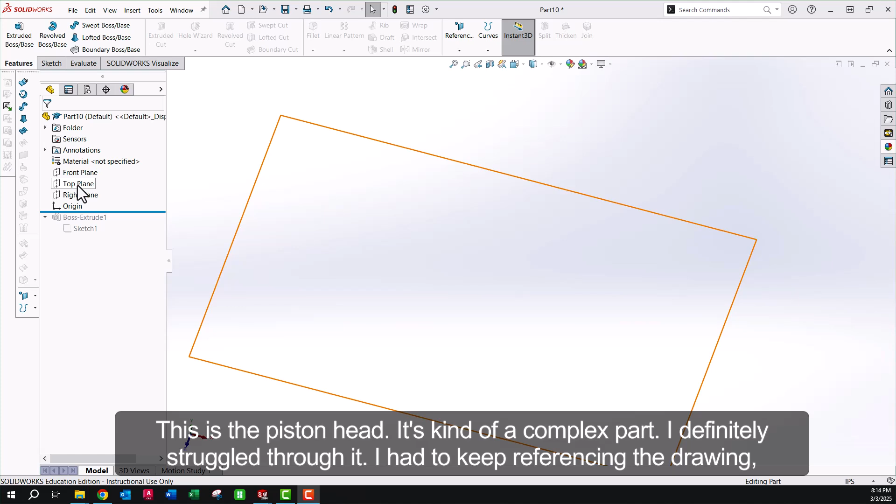This is the piston head. It's kind of a complex part. I definitely struggled through it, had to keep referencing the drawing, slowing down, thinking through my steps.

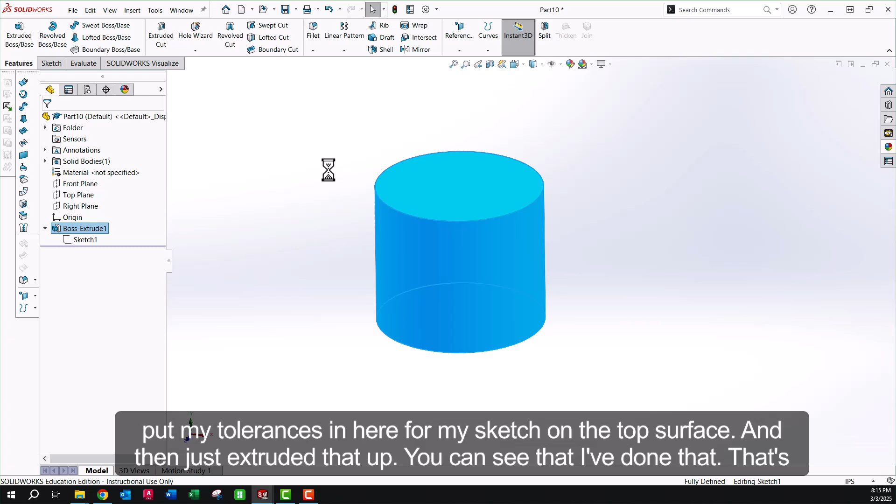I've gone ahead first and put my tolerances in here for my sketch on the top surface, and then just extruded that up. You can see that I've done that. That's just the entire height of the piston, 2.35.

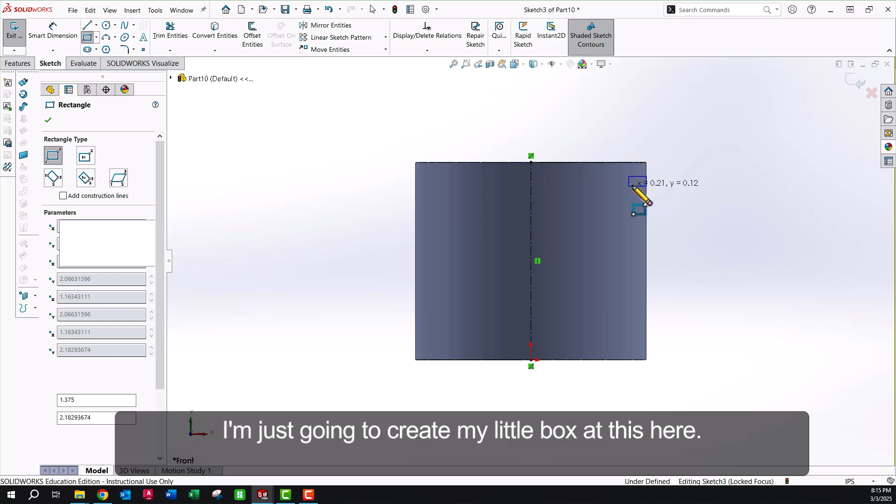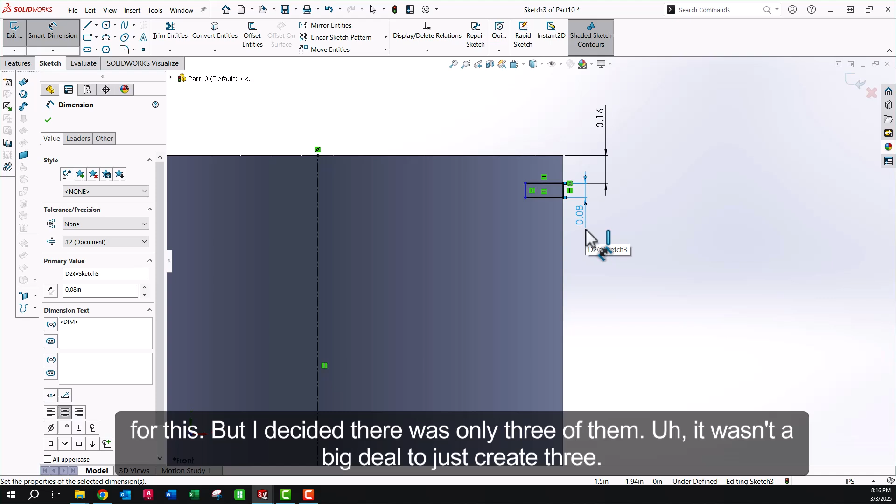And now I'm going to do the revolve cuts, where the rings go. First thing is usually a good idea to put an axis in there, and I'm just going to create my little boxes here. Just going to dimension one and then base the other ones off of that. I could use a pattern for this, but I decided there was only 3 of them, so it wasn't a big deal to just create 3.

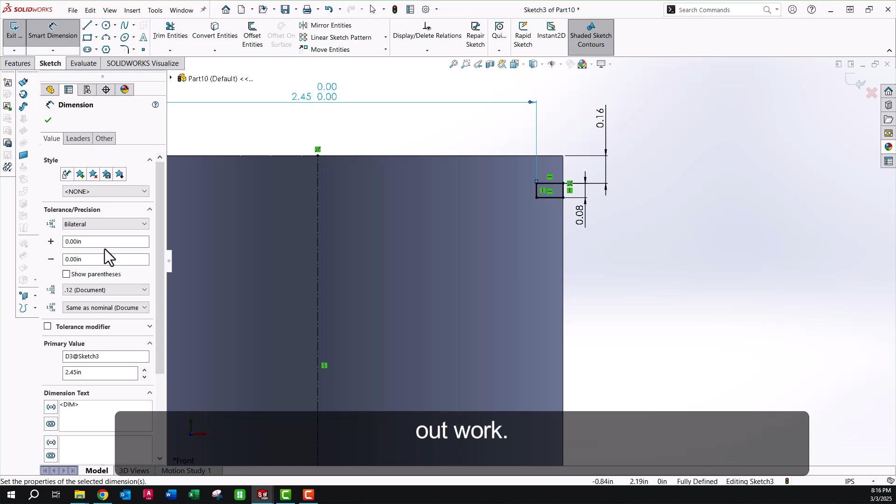Okay, so we have one in there. We're going to add the tolerance that the drawing calls out for. Got to make sure you have enough places after the decimal to display it. Okay, a couple more boxes.

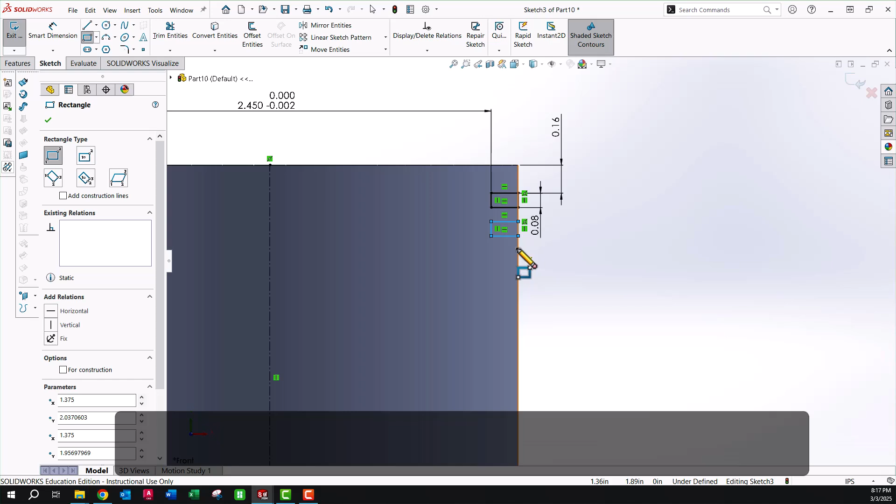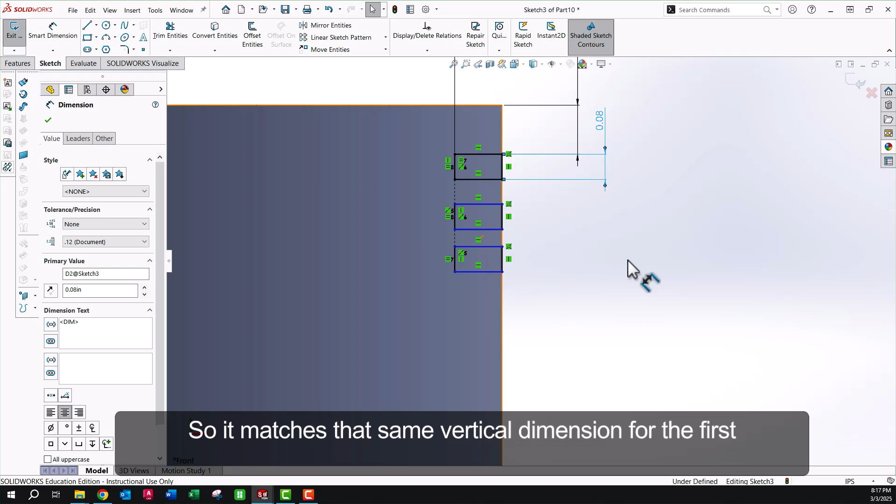Okay, we are going to make these 3 lines all collinear, which locks those into place. And also we're going to make them equal, so it matches that same vertical dimension for the first one.

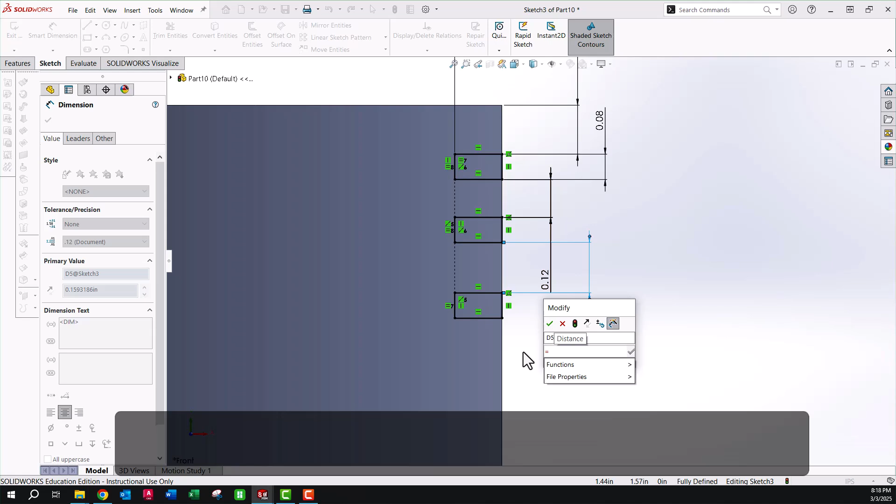Now we're just going to do a gap there, distance between. And then what I'm going to do here is I'm going to start to do the same thing, but I'm going to type equal instead, and tap the distance that I put in above. Just tap on that dimension, and it's going to make it equal to that. Kind of a neat trick.

Okay, cut revolve. First step is done.

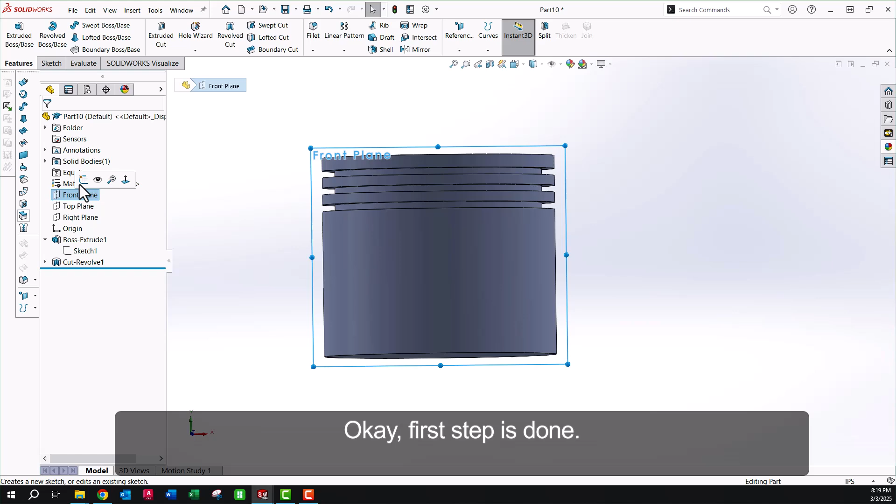Now we're going to make some cuts. I'm going to do a mirror line, and take like a chunk out of each side of this piston.

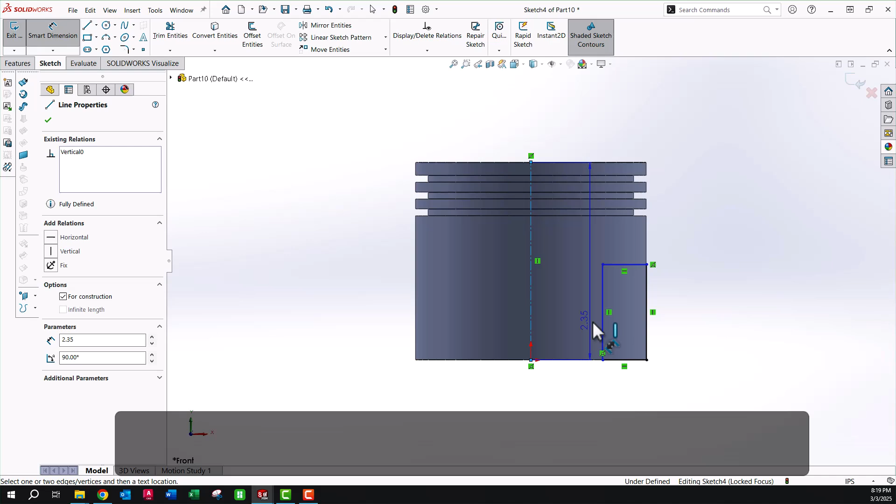Took me a second to figure out where that was on the drawing. Okay, simple mirror across.

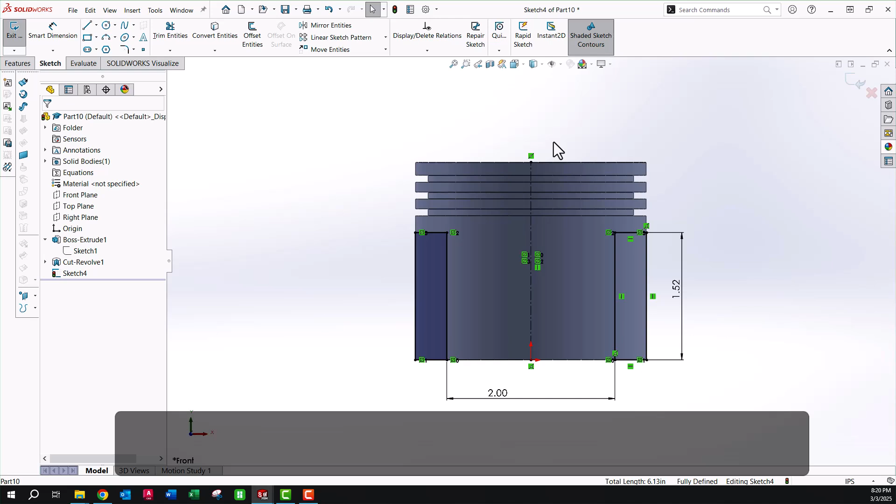And for some reason, that other one isn't shading. That makes me nervous, I hope this cut works. Oh, okay, through all, both, going in both directions. Okay, we have those cuts.

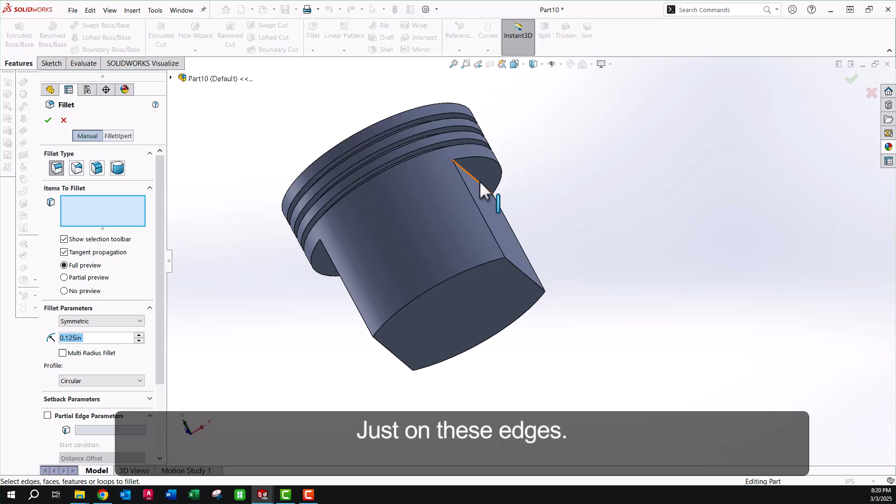Gonna add a fillet, 0.125, just on these edges. There and there. Okay.

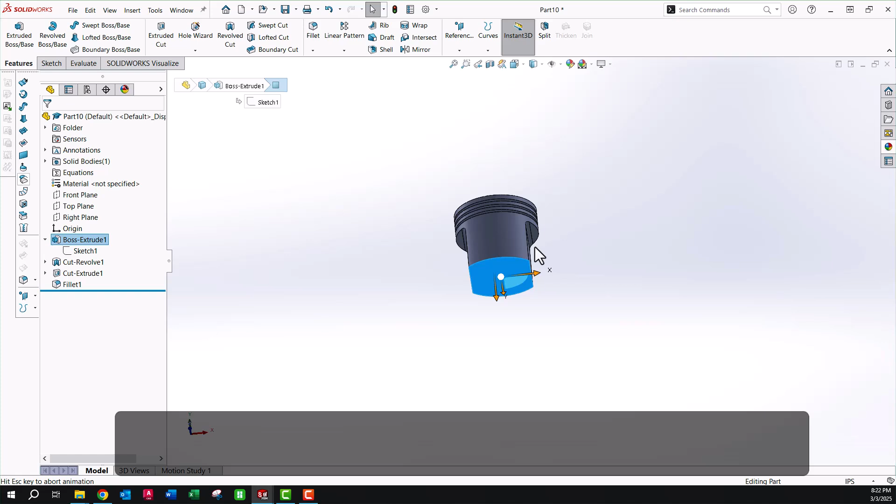We're going to do some cuts on the bottom. So, sketch on that bottom surface there, and a center line, because we know we're going to do more mirroring.

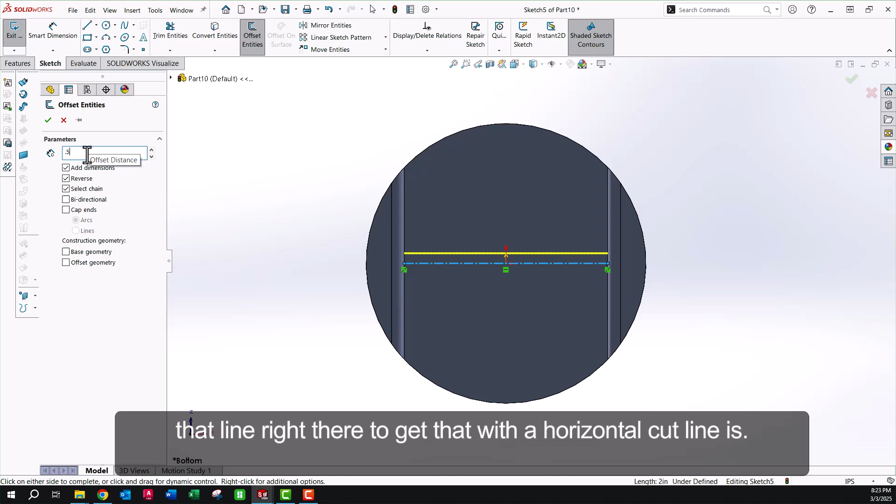We are going to offset that line right there to get where that horizontal cut line is. And the next thing we're going to do is we need an offset off of that outside edge. It's 0.125, and it's also offset off of those edges as well.

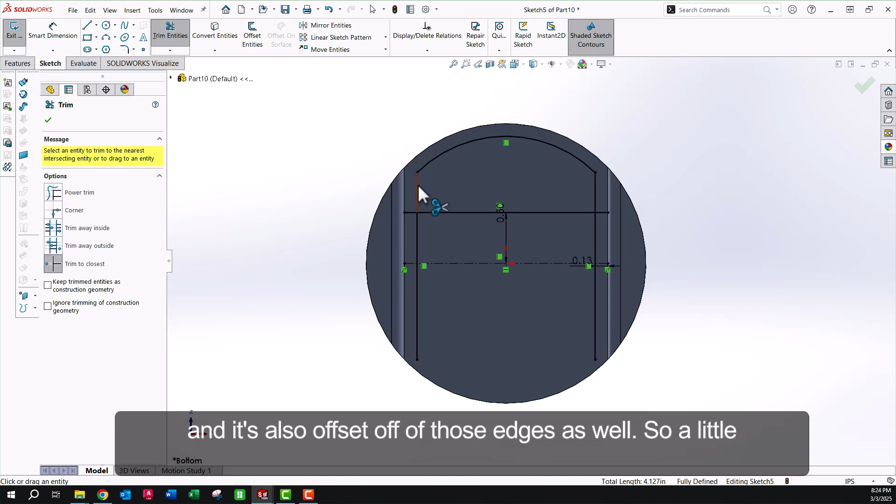So a little bit of trimming. I think I might lose a relation in a second, so I'm going to have to fix it. Yep, I lost it. Okay, so now what I'm going to do is... what am I going to do? I'm just going to make these equal, and that way it locks that into place. There we go.

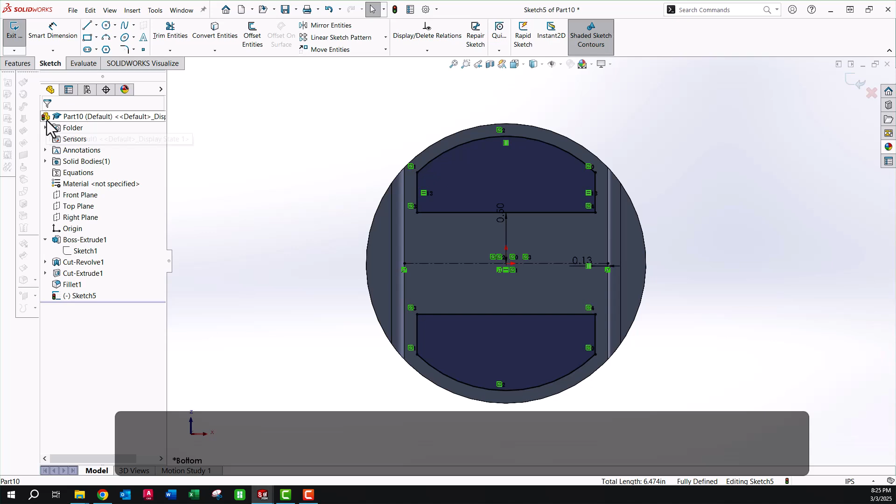Mirror across. Cut depth is 1.5.

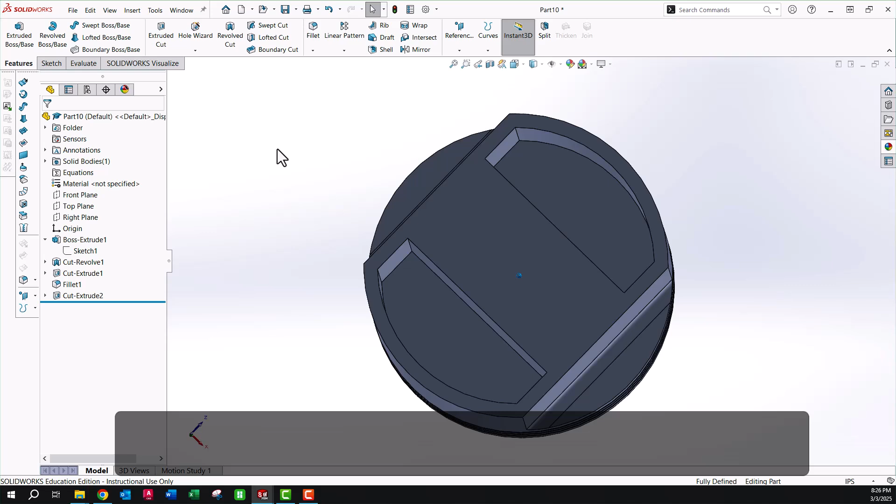Okay, we have another cut. It's a little more complicated, but similar principle.

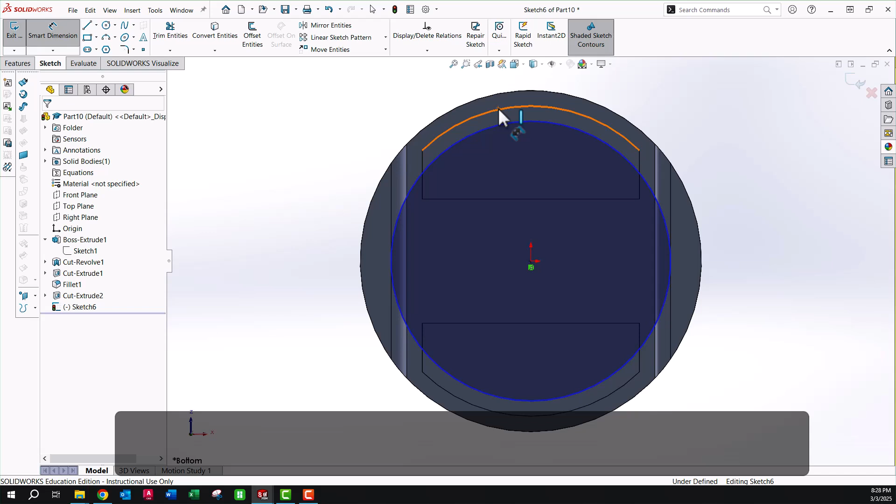Okay, another sketch on this surface, same surface. We need to offset that edge. The easiest way to do that is to do a circle and then make that offset off that edge that we created.

We know that's 0.125, and now we want to use those same edges that we used before. Now what I'm going to do is go up a little bit higher than where it crosses at the top there, so it doesn't cause problems.

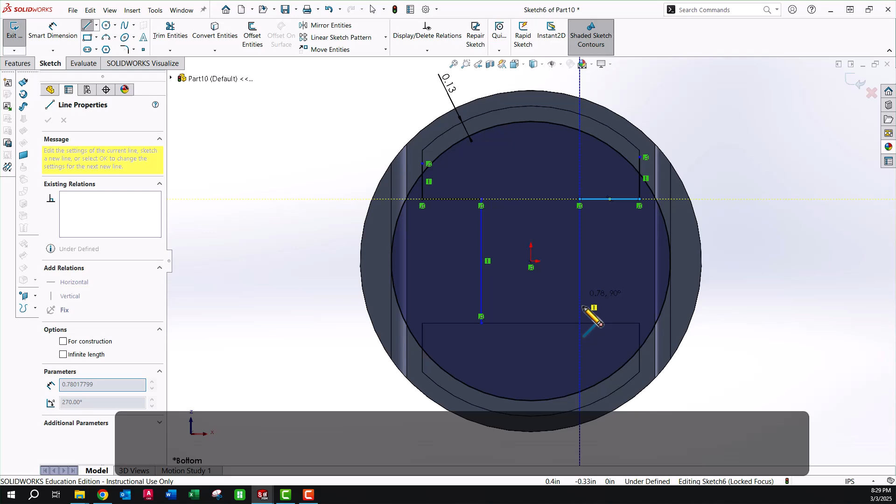I'm just going to put these down here. I'll probably trim those in a minute. Trim away those extra lines and trim away that remaining circle.

And I think what I'm going to do is I'm going to add a center line from the origin, and that way I can create my mirror line. And then I'm going to trim,

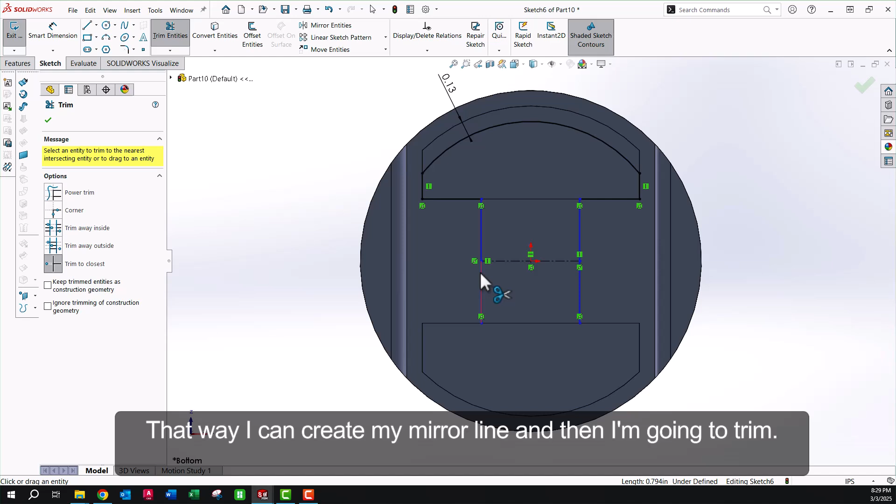but it's not locking into the origin. I'm going to have to fix that in a second. Okay, I'm going to add that line, which I should have added in the beginning.

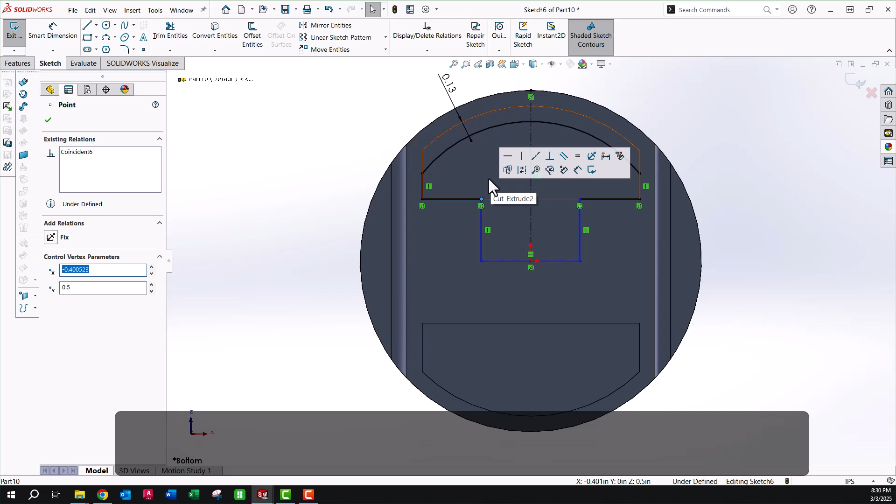I'm going to add some symmetry here. So I'm going to take that point and add symmetry, that's what that little first symbol is there. So now those are symmetric around that center line.

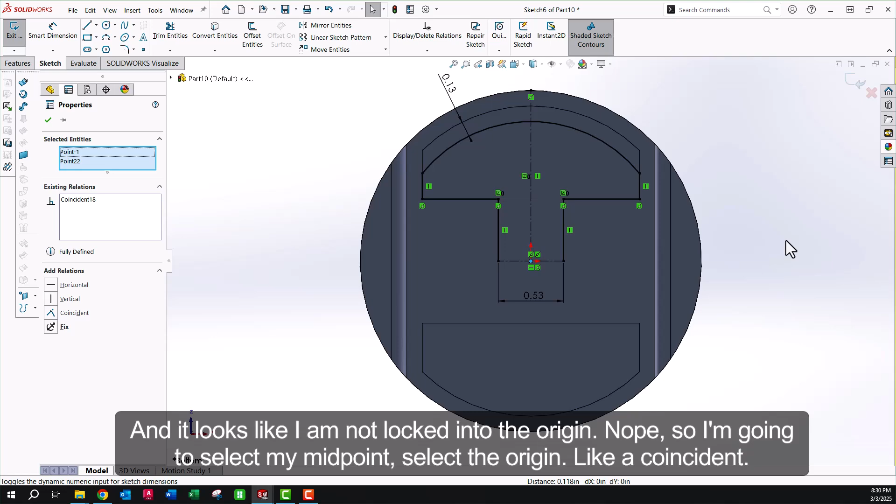And now I add my dimension for the distance between those. And it looks like I am not locked into the origin. Nope, so I'm going to select my midpoint, select the origin, make it coincident. There we go. Okay, so let's mirror that across.

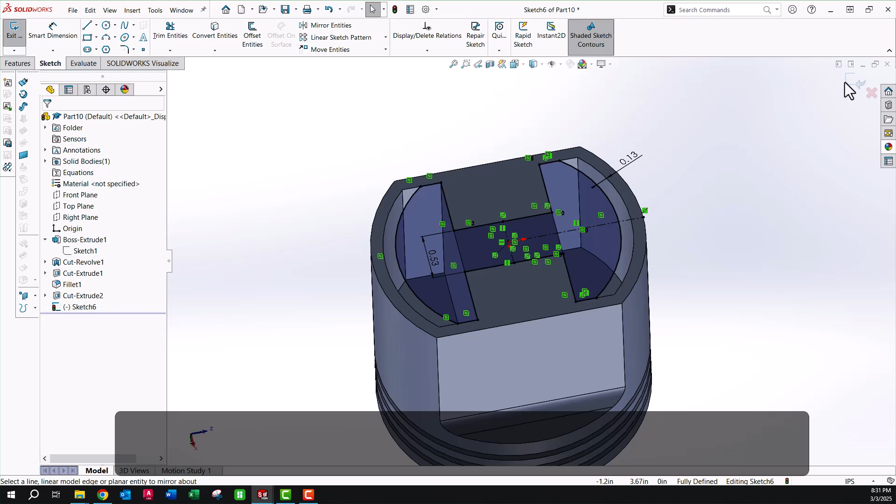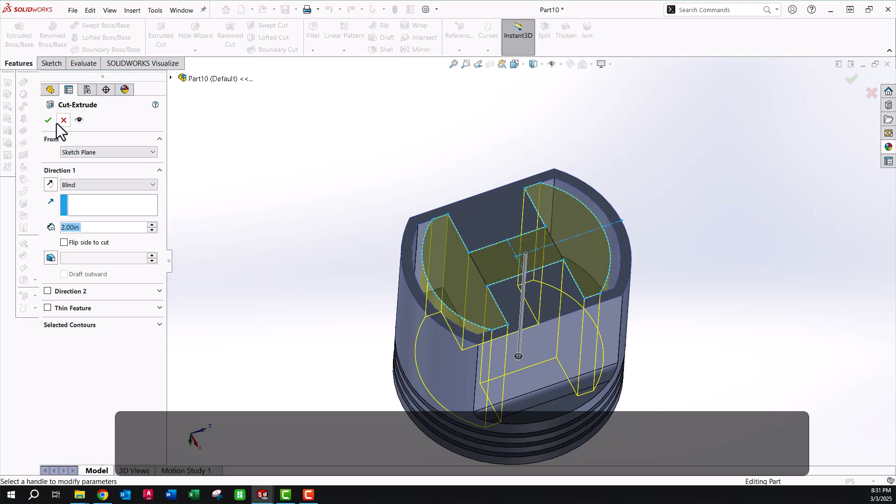Okay, the original depth of that first cut was 1.5. So we want to actually type in 1.5, which is already there. And I need to add 0.5, so I'm going to add the plus symbol and 0.5, which is 2. Could have done the math myself, but that gives the depth.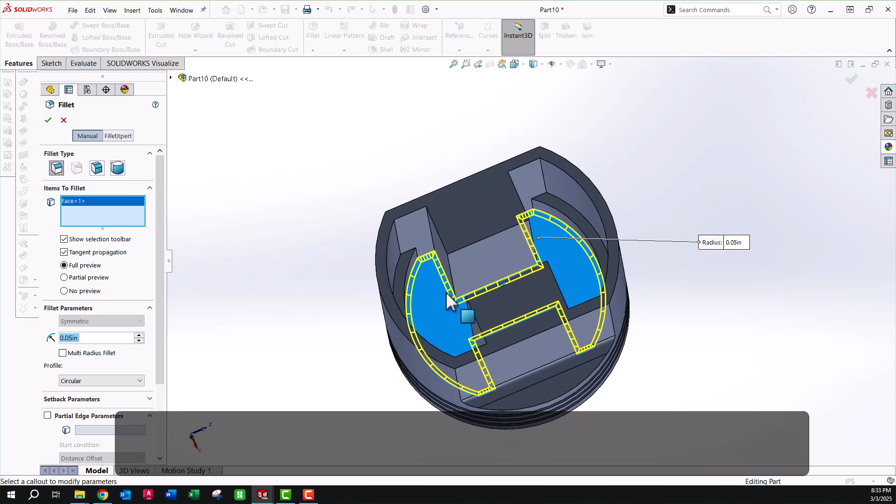Okay, now we have a whole bunch of fillets on the inside, and I recommend you really check the drawing. I hope I got all of them. There's a lot. There's the bottom surface, and I'm having selection problems right now. It's not clicking on the right thing. There we go, got the face there, this face there, and let's take a look.

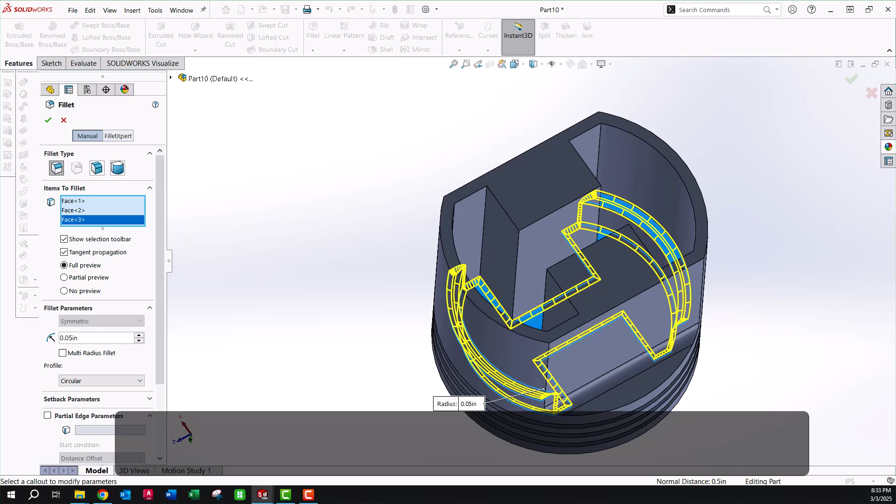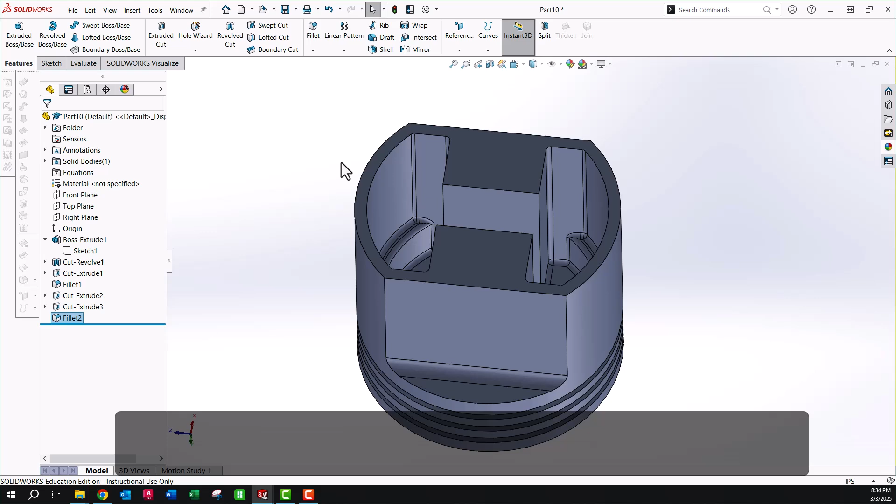It looks like the drawing has more than that. It's got this edge, this one, and then all the way around. But that's it after those. Okay, that looks right.

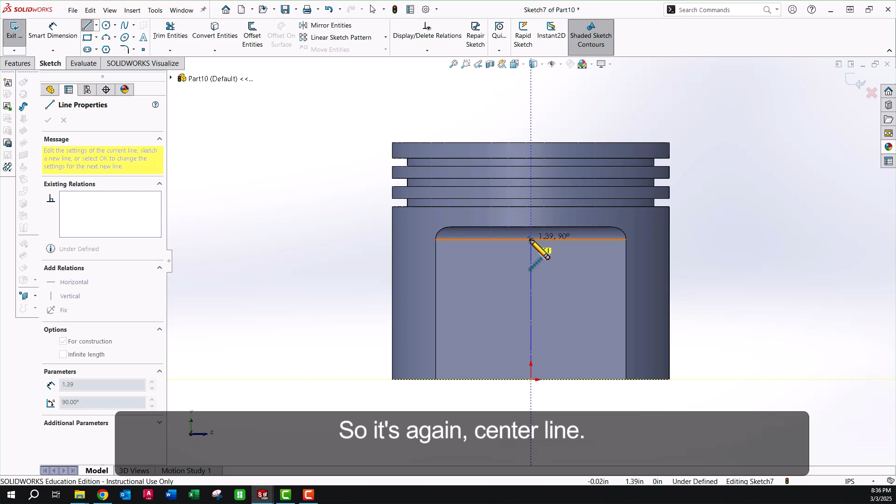Okay, let's do, we've got a cut that we need to do here. So once again, center line to that point is fine. Do some more lines and do another mirror. This line goes over somewhere here and then touches that point there. Need to change these back to solid lines.

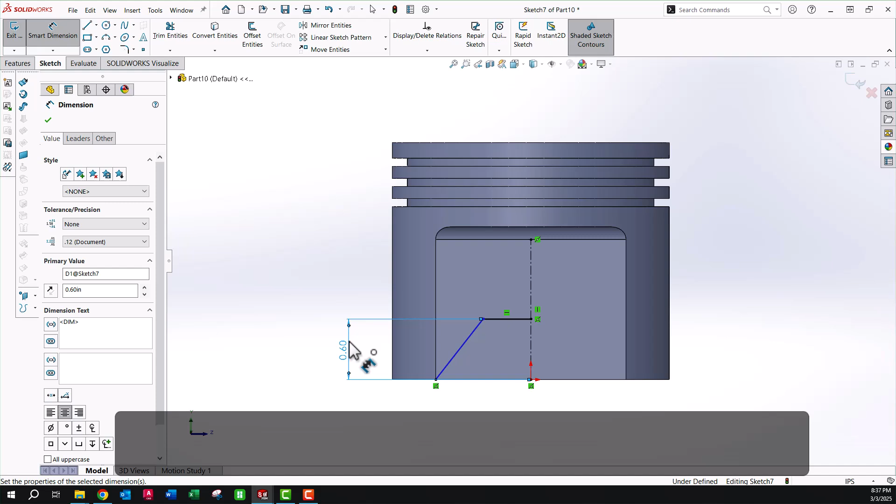And the height of that, it's giving me a distance from, there we go. Okay, 60 degrees. Okay, mirror. And we don't want to forget the line down at the bottom to complete the shape. There we go.

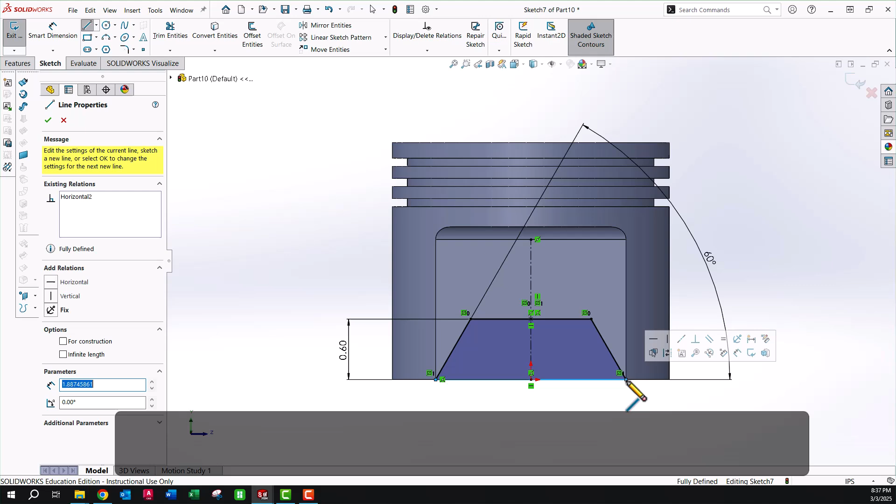Okay, so this is a through all cut. Okay.

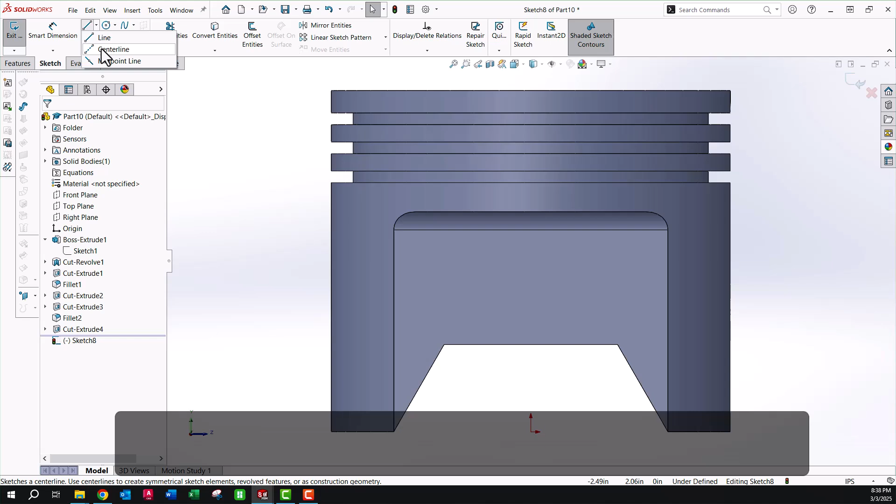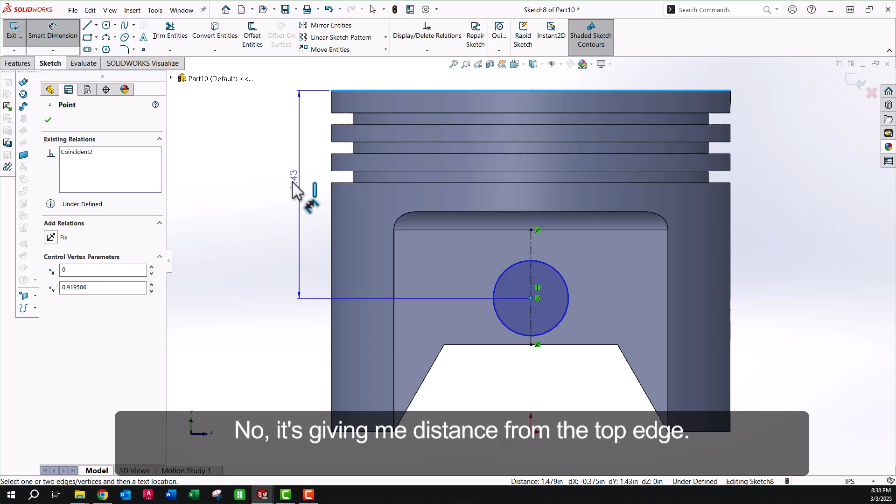Now we got to cut circle profile here. Let's just kind of rough in the circle without getting coincident on that midpoint. I don't want to add that because I don't think it's that. No, it's giving me a distance from the top edge. There we go. Okay, 0.562.

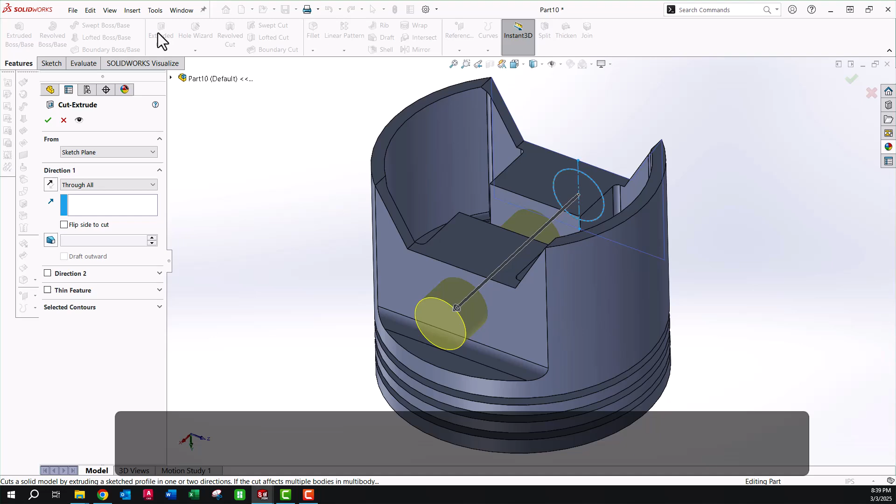Looking good, this cut goes all the way through. Yeah, make sure you're saving.

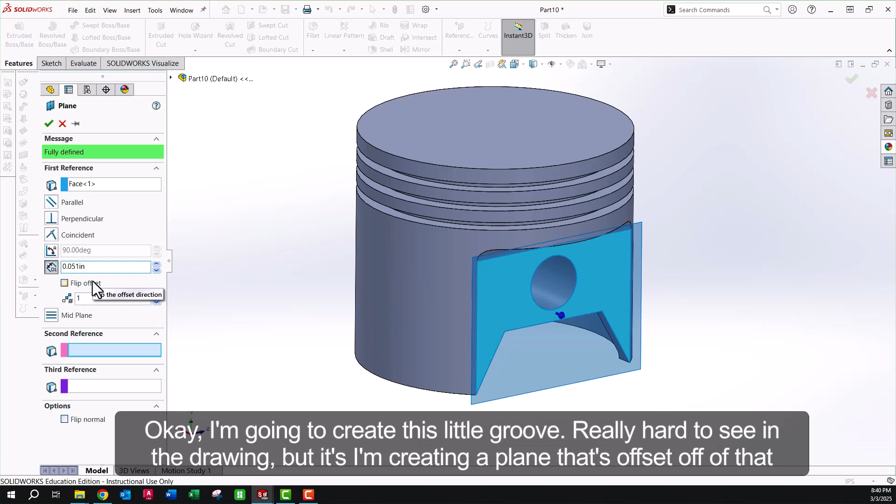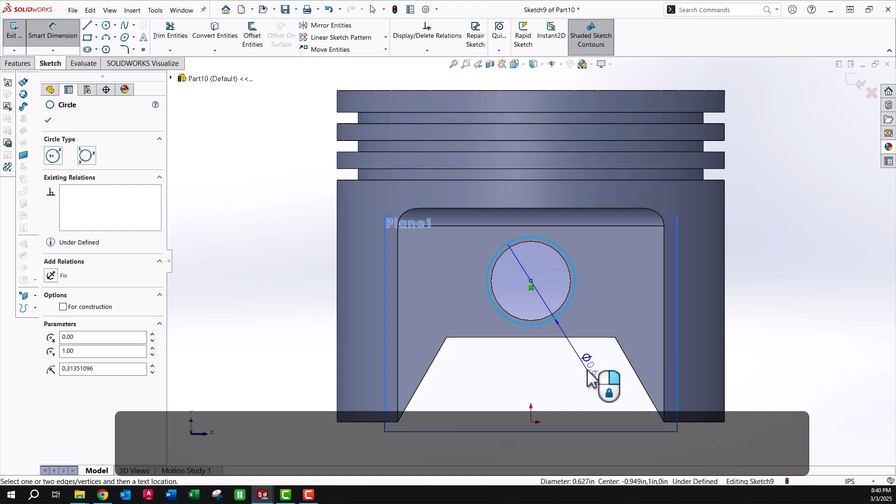Okay, I'm going to create this little groove. Really hard to see in the drawing, but I'm creating a plane that's offset off of that surface. It needs to go the other way in order to find where that groove is. So you have to look kind of closely at the drawing, and then what I'm going to do is just share the same center point as that circle, and then I have a different diameter, 0.596.

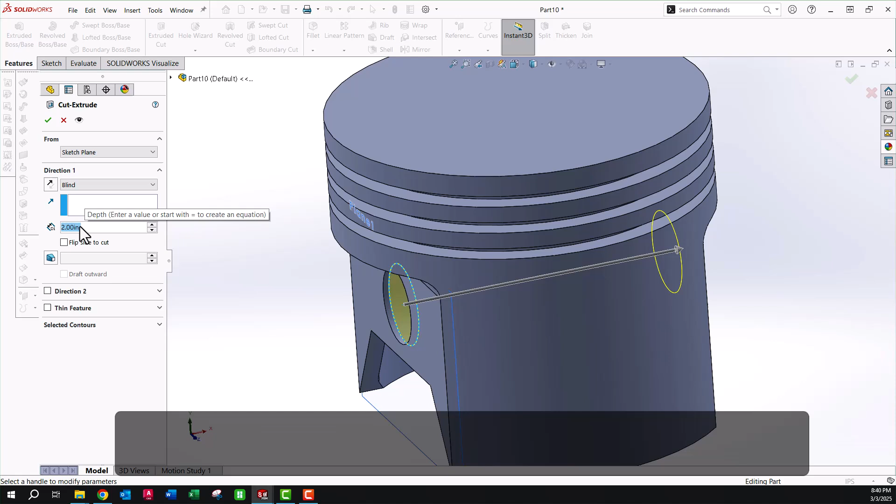Okay, and then I'm just going to cut the depth of that groove, 0.039. Okay, there it is.

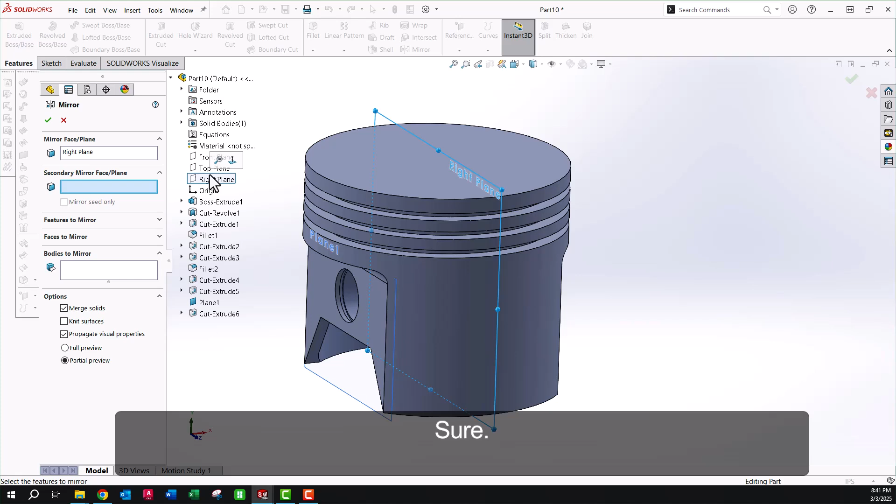Okay, let's mirror that across. There's our reference plane. This cut is a feature, not a body, so make sure you're in the features to mirror, not bodies. Yep, there it is, turned out all right.

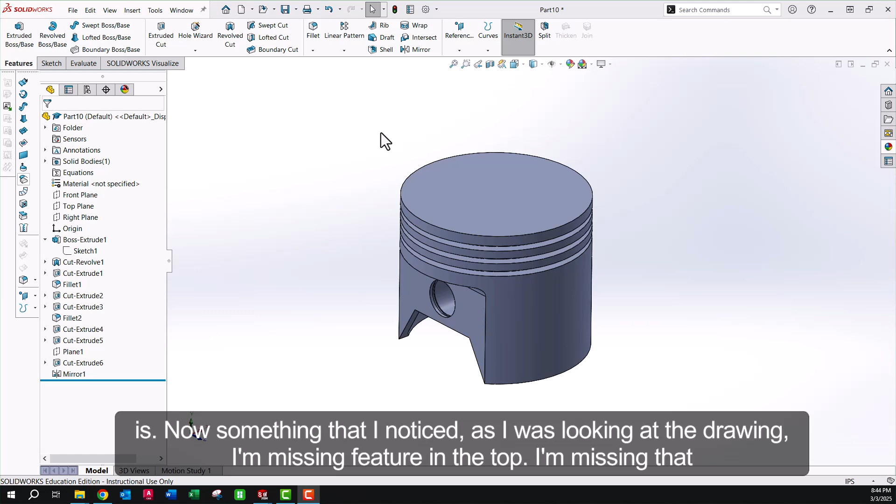Now, something that I noticed as I was looking at the drawing, I'm missing a feature in the top. I'm missing that kind of dome. So I'm not entirely sure how I'm going to do this yet, but I know I just want to have a reference dimension of 2, and I know that's where it needs to touch at the bottom.

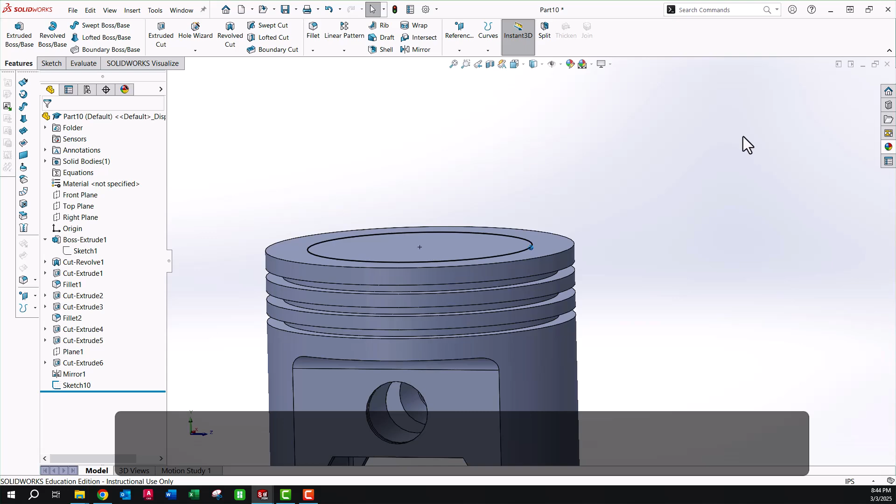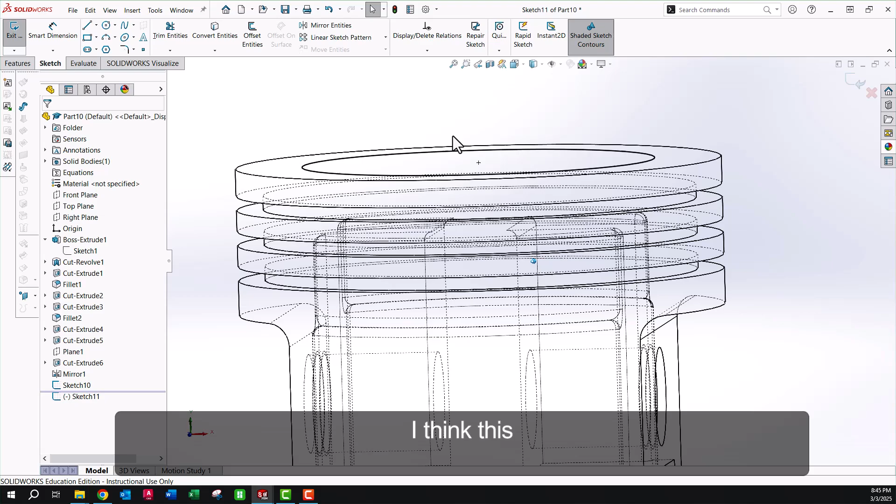Okay, so I'm going to do the front plane, and I'm going to get rid of my shading so I can see where that is. So it needs to be offset from that line. I think this is what I'm going to do.

Do a center line from the center of that circle, come down, and then do a little arc coming up. I'm not entirely sure where that goes yet, but I know what my depth is here.

Nope, that's not it, I forgot a 0. There we go.

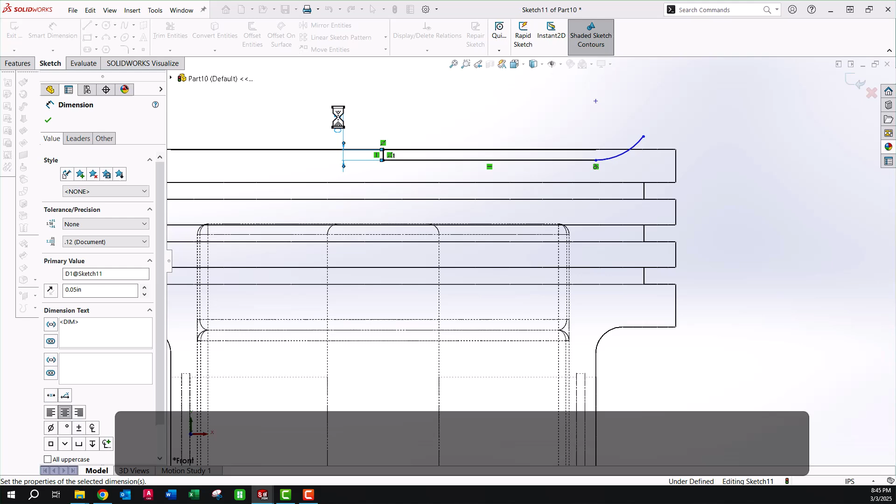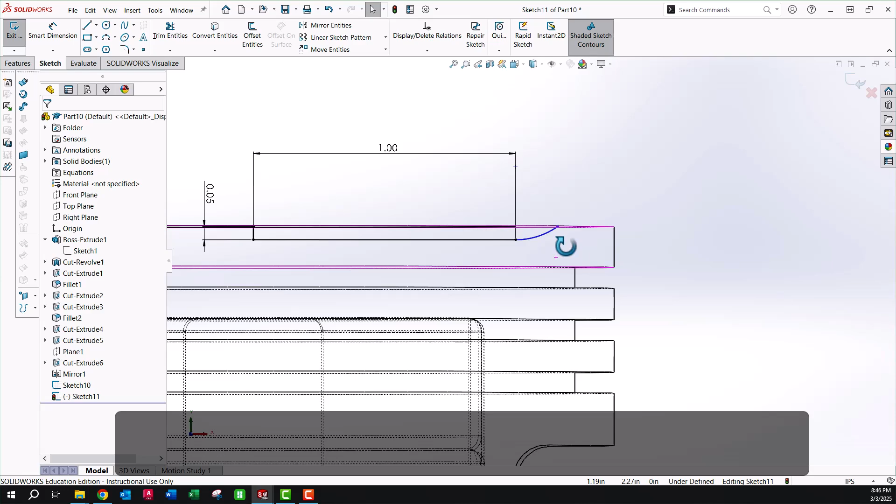Now I need that point to be that same distance, and I can't make a coincident with that line, that circle, so I'm just going to have to manually put it in at 1 because I know it's 2 overall. Coincident with that surface, and then I know what the diameter is around that entire thing.

So center line there, and a construction line. And that's my overall. Okay. Gonna anchor this.

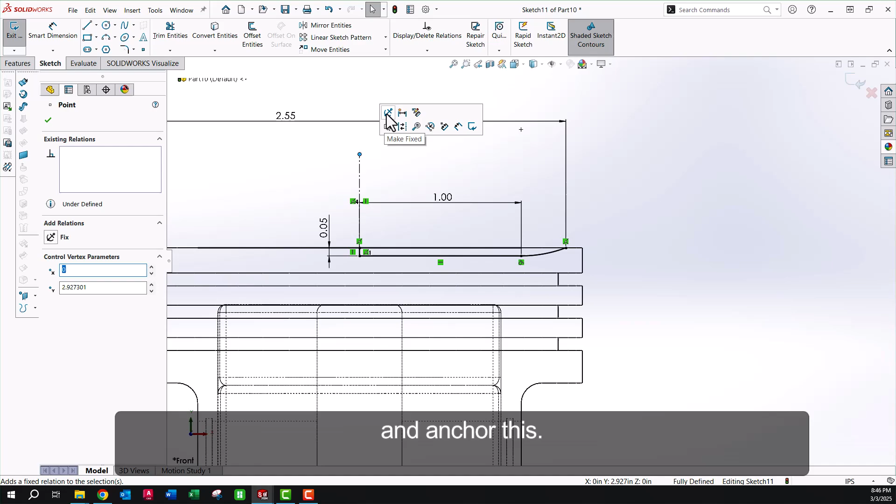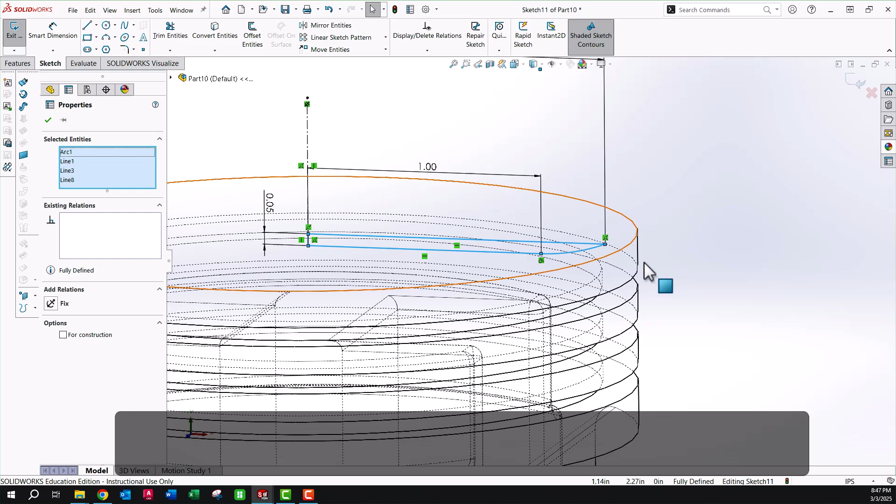I'm gonna hide that sketch because that's confusing. Okay, now I need to complete that shape with a line. Why is it not shading? Oh, I guess it is okay, I don't know what that was about.

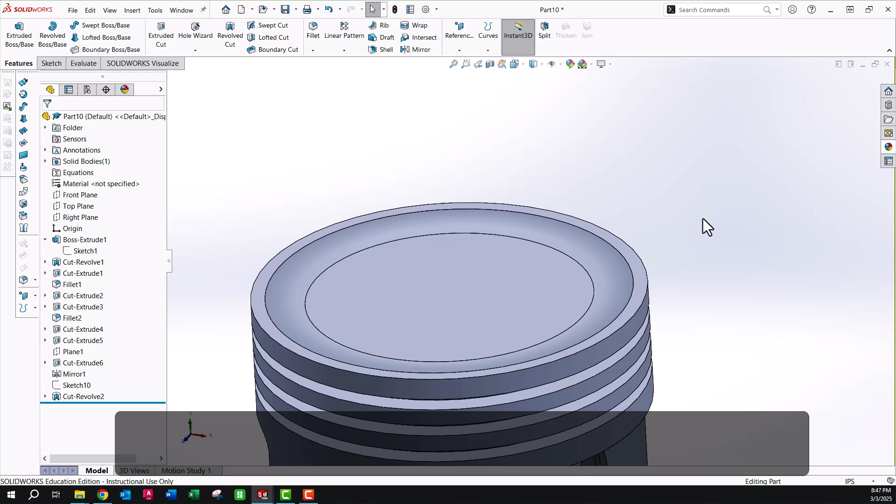Okay, cut revolve. There's the dome. Okay, looks good.

Just have to add material now.

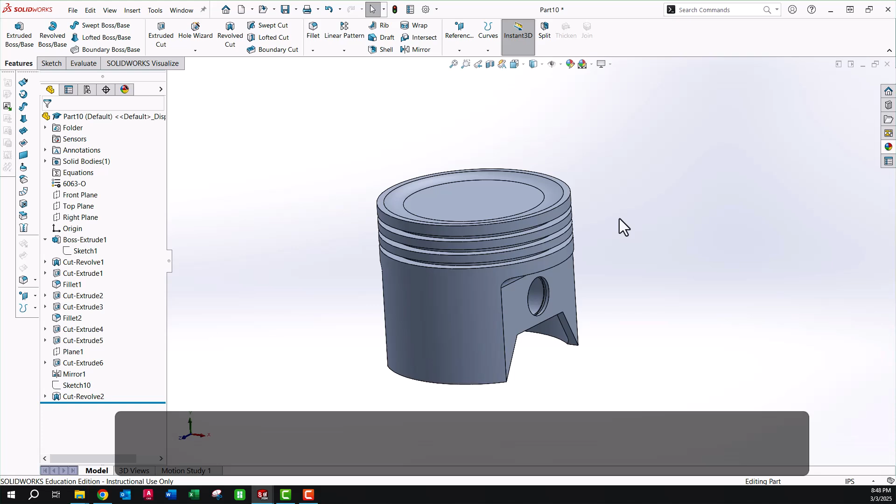And let's make it pretty by turning on the shaders. Okay, that's it, check us out.